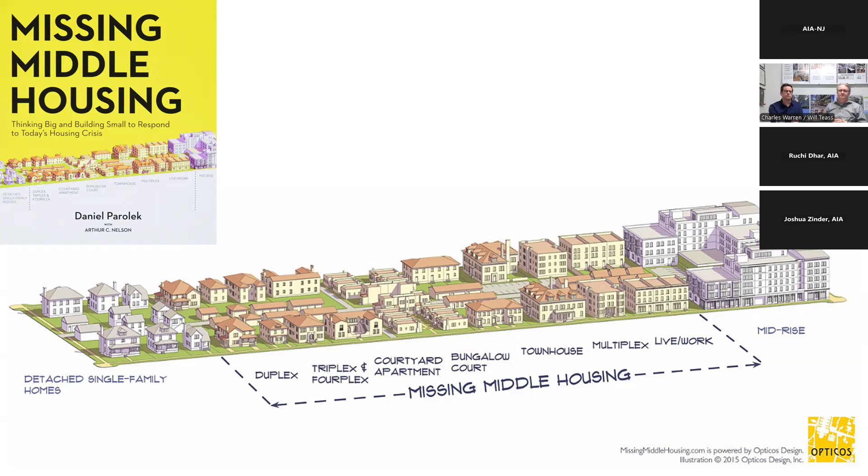So this is another poll question. For those of you - this is a personal preference, and again this is anonymous - but I'm curious within this audience if you can rank the top 3 choices of where you personally would like to live. Is it a single family detached home? Is it a duplex? Is it a single family attached or semi-attached, like a row house or a brownstone? Is it a triplex? Is it a large apartment building? Often they have amenities that are actually pretty nice, pools and whatnot. Triplexes - just getting a sense of where folks would like to be.

So we'll give that poll another minute or two. So I think it seems like most people prefer either that single family detached or single family attached.

Cool. And I think if anyone's interested, I think that we've done this before where we've exported the data, and we're happy to share that. Yeah, it's kind of an interesting way to look at it. All right.

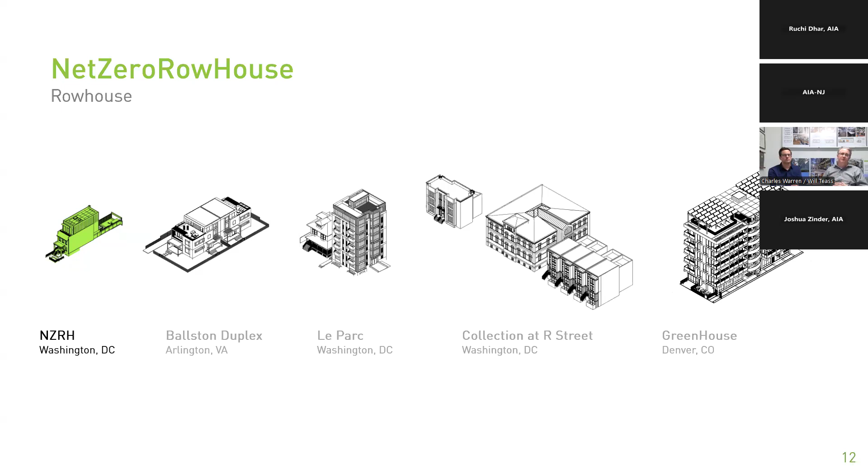And so to do that, we wanted to create space above. So we have what's called a pop-up.

We have space below in the form of an accessory apartment or separate dwelling unit, and then we also did a rear addition. But one of the things that's important to note here is that we were very interested in maintaining the relationship of the existing fabric to the street. Keeping the porch was key, keeping the dimensions of the front yard was important, keeping the existing window masonry openings, and really preserving that because it has such a key relationship.

And then what you're seeing above is some sense of that third floor addition. That was set back both because we needed to for zoning, but also because it gave us an opportunity, as we'll see later, for some more outdoor space.

One of the things we try to do as designers is really think about not just the building we're working on, but also the streetscape and the adjacent construction. Those are some of the clues or constraints that are really important to consider when we're thinking about design.

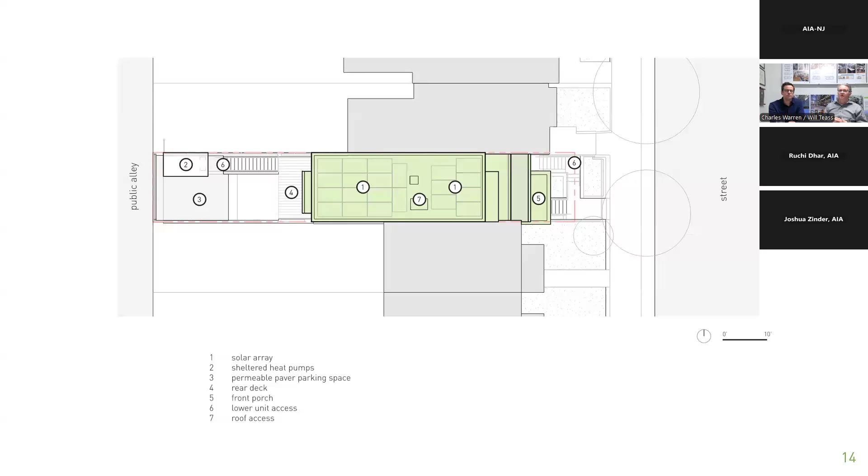So in order to take a house that was about 1,500 square feet and expand it, we needed to go back, and you can see that rear addition here. We also have a public alleyway at the back. We're blessed to be in a city that has a really robust alley system, which helps with a lot of these projects. We were able to create off-street parking, and then we have an entrance, which is keynote 6, down to the lower level.

So this is a diagram of one of the types of projects that we do. What's in green is what we kept, right? We kept the front facade, we kept the roof line, we kept the party walls, obviously, because they support both our construction and our neighbors. But then we talked about adding things.

What you're seeing in yellow are the rear walls that were added. And then this project, we went a little bit above and beyond, related to the desire from an interior space perspective of minimizing bulkheads, but also allowing us to run these systems as part of a net zero project. So we replaced the floors, and then we went down into the ground, which is where we have that accessory dwelling, and then we also did a 3rd floor addition.

There was a point at which you opened the front door and looked down a story into a pile of dirt, and looked up into the sky. It was nice to get past that. It was fun for a little bit.

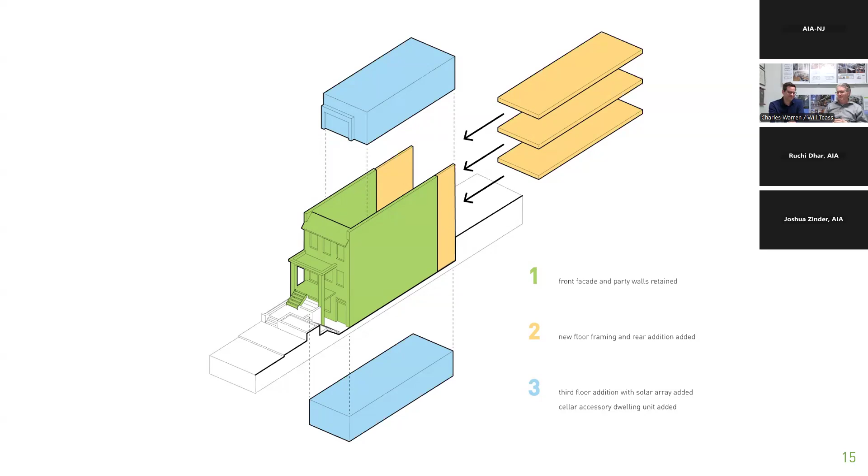One of the other more subtle things here is we played with the section a little bit, so you step down from the living room passageway into the kitchen. Again, it goes back to this idea of keeping a relationship to the street, keeping the floor lines of the existing floors even though we replaced them, maintaining the relationship of the floor to the window and then the windows to the ceiling. But we wanted a bit more ceiling height, so we ended up pushing down further into the ground at the back, which corresponded to the bedroom below.

Creating outdoor space in urban environments is something that we also are very focused on. So in this case, we created a space at the rear with a pergola. It's an opportunity to connect the inside to the outside.

We can do this kind of thing in our climate zone probably for about 6 weeks out of the year before the mosquitoes rush in. So everyone's first question is always, well, what do you do about mosquitoes? The short answer is there's a roller screen that can close off the two areas.

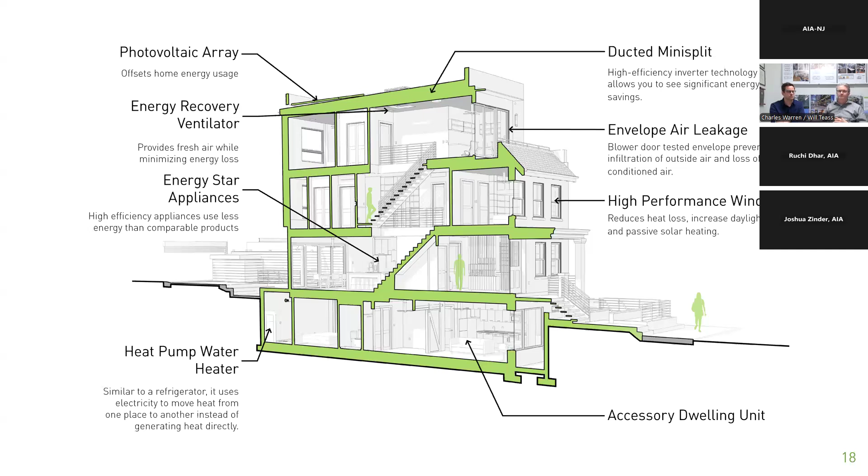I think right now we're seeing this evolution on this block and other blocks where more and more people are extending back and extending up. So right now it sticks out a little bit, but the idea was to compose something a little more contemporary as a counterpoint to the front.

We used a combination of resawn wood here with some boral siding and some vertical metal siding to create a palette and a composition. And then having that open space that connects the living areas below. This is an image at the very top where we took that top level and set it back a little bit, creating some outdoor space.

And it really, because there's a beautiful tree in front, certain times of the year you have this wonderful treehouse experience. Another benefit of the site plan, which was happenstance, is that this is north facing, so in the spring, summer, fall, you're generally in a fair bit of shade, which is nice, particularly when it heats up.

As I mentioned, this is a net zero house. This is a passive house. I should also mention, in the interest of full disclosure, this is actually my house. And this is my wife and I sitting on that porch, and it's a space that we really, really enjoy.

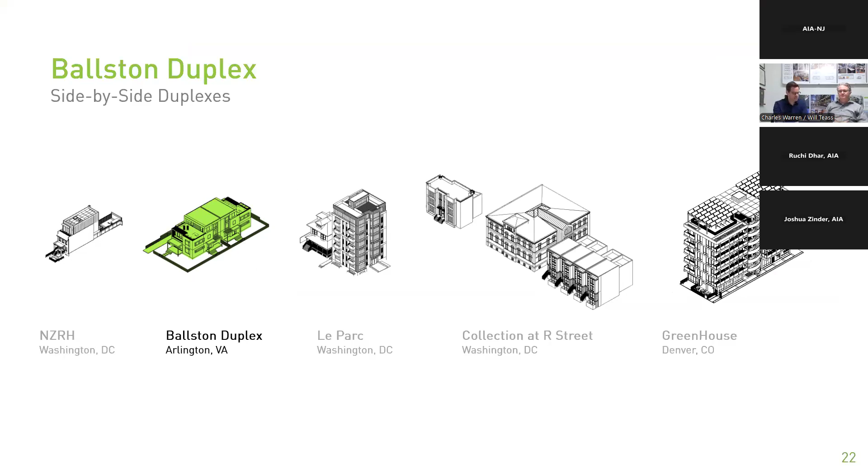So we wanted to move on into the next project. Charles will take us through Ballston Duplex. Great, so this is a project we're calling Ballston Duplex.

So this is located in Arlington County, Virginia. Ballston is a neighborhood in Arlington County, a fairly affluent suburb just outside of Washington, D.C. And in many other similar counties in the country, there's a real housing affordability issue. This county is also home to the Amazon HQ2 campus, so there's a lot of demand being thrust upon Arlington County. It's also a location with a lot of tech industry, defense contracting, I'd say government-adjacent industries. We'll see how that plays out over the next couple of years, but there's a high demand for housing and a low ability to produce it.

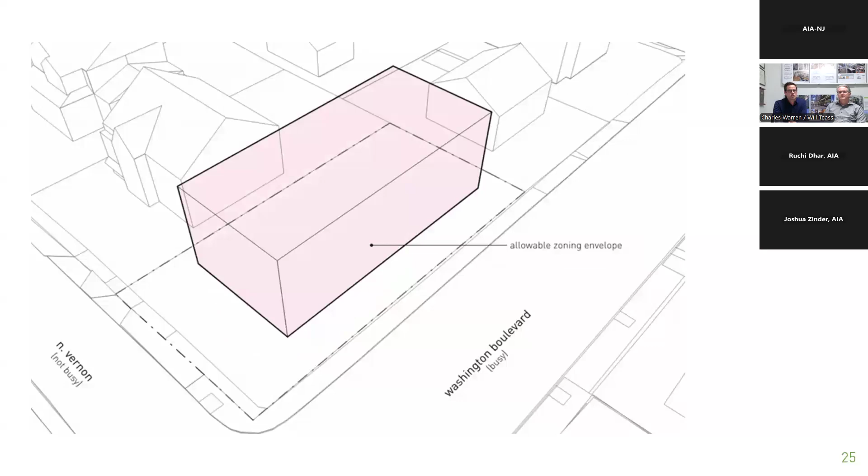So just a quick strategy. We have this cute little animated graphic here, but the existing structure that was there had really been damaged and not maintained, so it didn't make sense to retain it. That was taken down as part of the project.

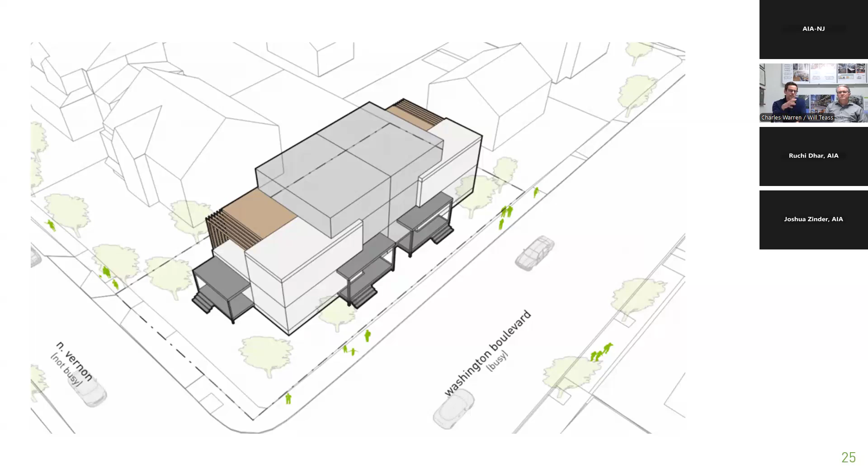The loophole I described requires the house to have two entrances off the busy thoroughfare, so that's why we kept entrances along Washington Boulevard. From an architectural standpoint we really wanted the entrances on the less busy street, but we were kind of hemmed in to do that here. To get this project to pencil out, the units had to be fairly large, which meant we needed a third floor. So from a massing standpoint, we tried to concentrate the height in the center of the building, dropping the massing down as it tapers back toward the residential streets and the neighbor to the east. We also added a series of porches to help bring the scale down to a human scale at the entrances.

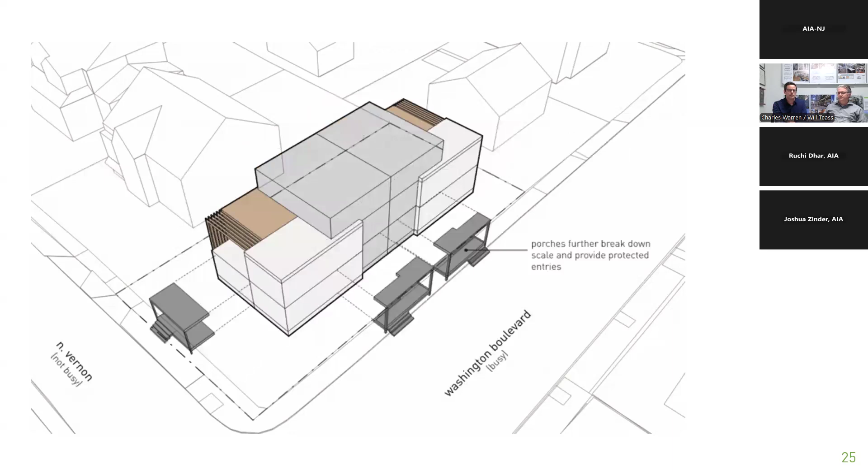Part of the project was subdividing the lots, so there are two lots created here. This is a true duplex with a party wall in the center. There's a common shared driveway that allows access off the residential street to the plan-left, west side, with a common entrance. The first floor is primarily living spaces—kitchen, dining room—with the garages, and the units are mirrored across that dividing line in the center.

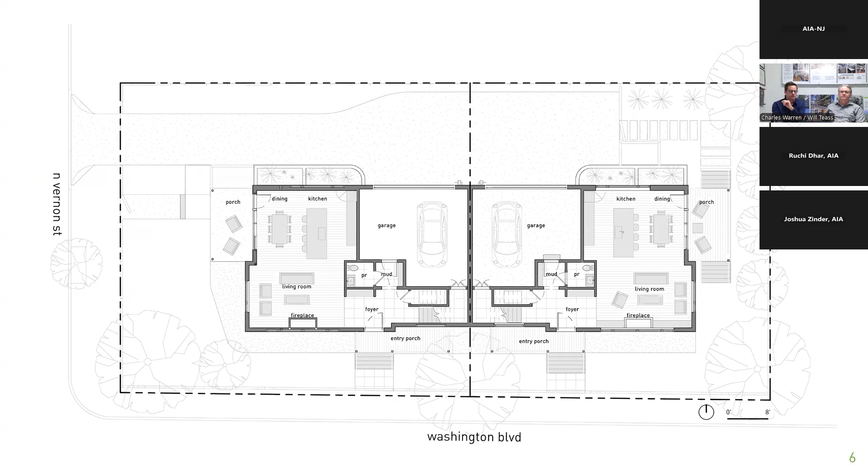One of the things we tried to do is introduce a lot of natural materials—we're using white oak and nice stones, but mostly natural materials as part of the project.

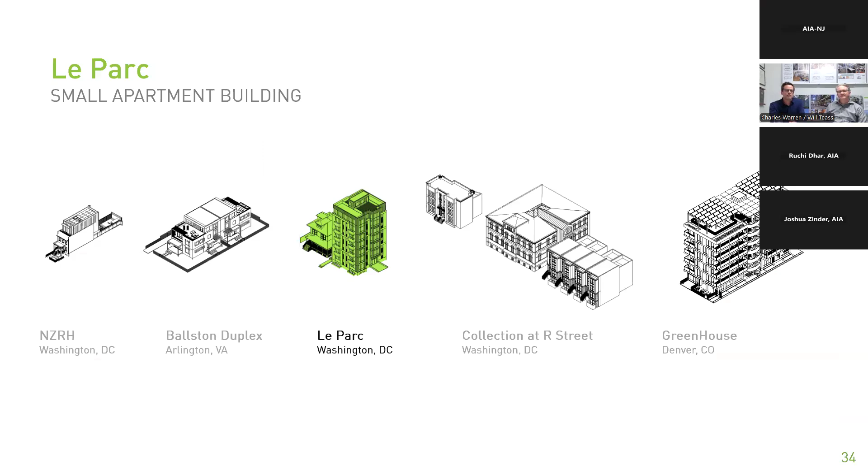So we'll jump to another project in scale - Le Parc, go to the next slide. Very similar in the sense that we have some of these abandoned lots, which tend to be a pretty common site that we end up working with. You can see a classic problem we have in DC, where these single family homes get kind of orphaned on some of these larger thoroughfares. This project is located in Cleveland Park, a historic district in Washington, D.C., about 2 blocks from the National Cathedral. Wisconsin Avenue is the major road on the left, and Macomb Street is a smaller neighborhood serving street.

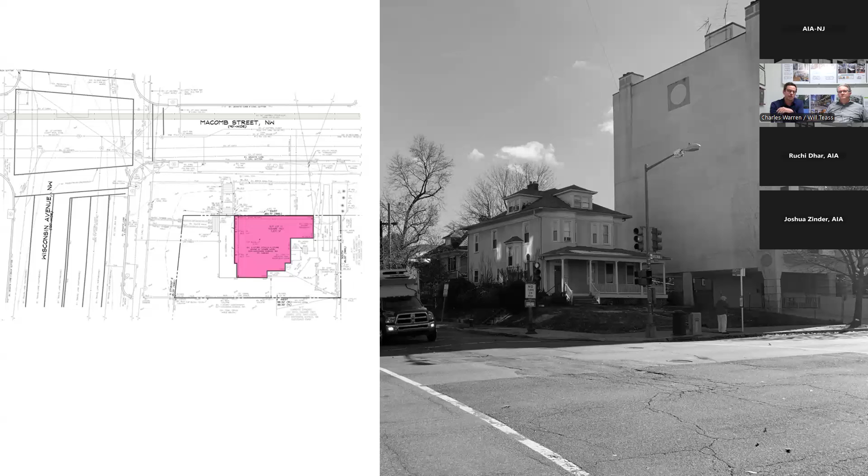This building was not technically landmarked, but it was considered a contributing structure to the historic district, so it was protected in that sense and we could not tear it down. So then what do we do? We had to get pretty creative.

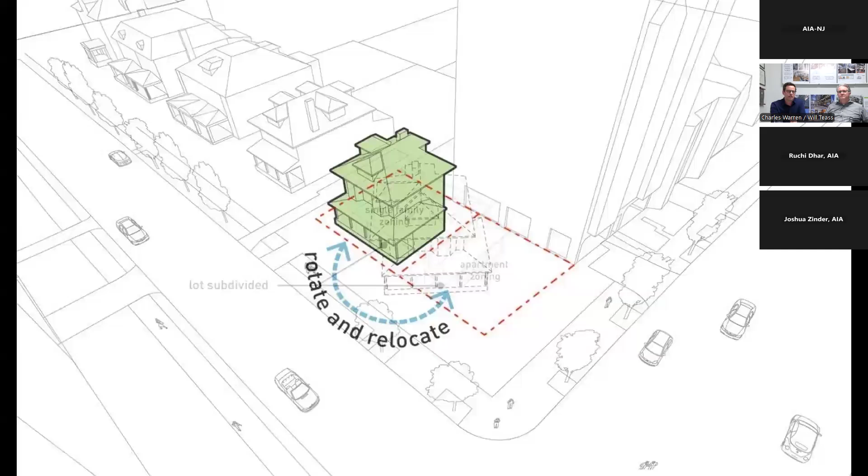We studied the site heavily, and it seemed that if we could really just move the house, we could free up the corner along Wisconsin Avenue for a new apartment building. Our strategy was to demo a non-historic rear addition on the house, move the house and rotate it to align with the existing historic houses along Macomb. That would free up a zone on the right side, a continuation of the street frontage along Wisconsin Avenue, where we could take advantage of the full zoning envelope.

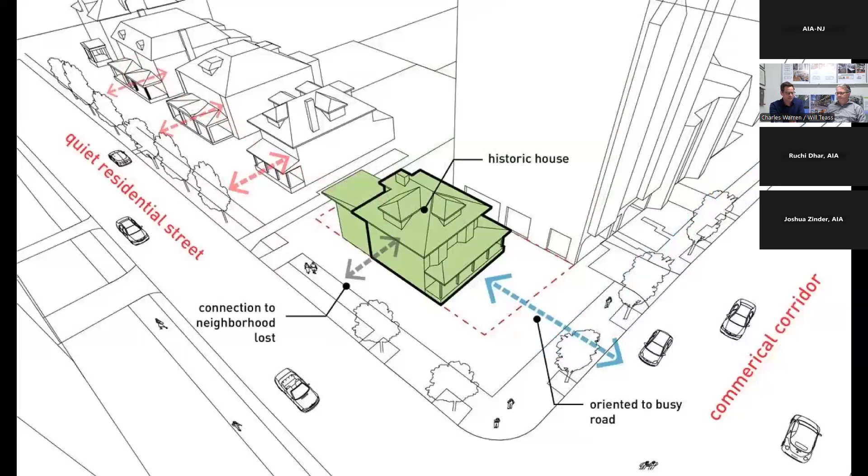That's a cool diagram, but obviously things are not nearly that easy. So here's a couple images of the house as it's being moved.

Initially, the way we did this is we had to lift the house up on cribbing, demo the foundation that was under the existing house, excavate and pour the new foundations, which had to be very precise because it had to line up with the house.

And as you can tell, it's a 100-year-old house, so it's not very square. Then we had to somehow manage to turn it 90 degrees and slide it over on a very tight urban lot, which you can see is a pretty heavy logistical feat. It was a fun day for the office - we all went out and watched this because we don't get to do this very often.

A shout out to Expert House Movers - these guys are incredible. If you ever need to raise a house or move a lighthouse - these guys have actually moved lighthouses, so that's how we learned about it.

So I'm gonna jump ahead to the final product, but I'll do a quick summary of the entitlements. I'm not going to bore you too much, but again, this is a project from 2019, and it was just delivered last year. So the process we had to go through, we had taken those initial concepts to Historic to get them approved as a conceptual idea, which took about a year for us to get through that portion of the entitlement process.

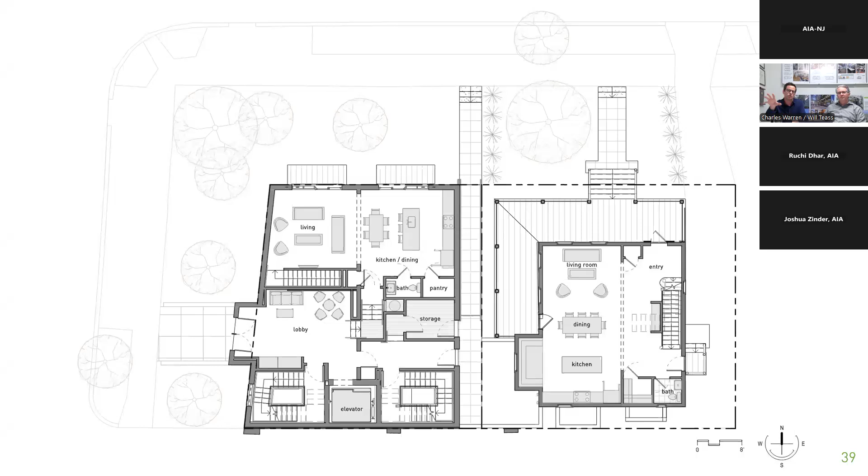This is a little bit of a poster child for what we'll talk about later - the point access blocks where you can do a single stair, single means of egress building. But you can see just the amount of core that we needed to have to get this to work. The layouts are really 2-bedroom units, and there's a nice exposure because you get 3 exposures around the building.

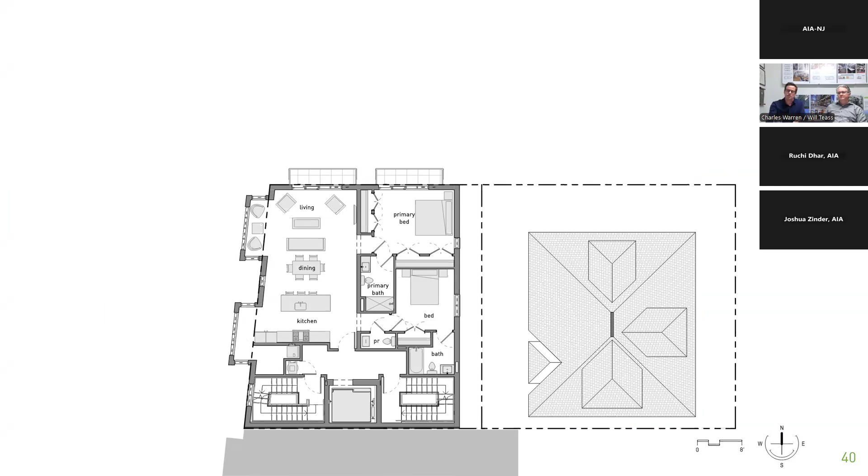DC does have inclusionary zoning regulations that kick in after 10 apartment units. What that really means is you need to provide an affordable apartment once you reach that threshold, and DC incentivizes this process with an additional bonus density to help underwrite those affordable units.

To be totally frank about it, on this project the financials of that unit didn't really make sense. So we designed this building to be 9 units. Part of that was just the margins we were dealing with and getting the numbers to pencil out - with carrying costs, site complexities, and the escalation in construction costs, it just put too much financial pressure on it.

And because of the way the site was configured, we actually couldn't utilize any additional bonus density - we're kind of stuck with the footprints we could do. So we couldn't add any more density to help underwrite those affordable units. These are more on - I wouldn't call them ultra luxury, but they are on the higher end of what you would see.

One thing that we have in DC is a tradition of what they call bay projections or bay windows. If you've ever walked through some of the row house neighborhoods and seen the nice bay fronts, those are technically in public space. That was part of the master planning of DC.

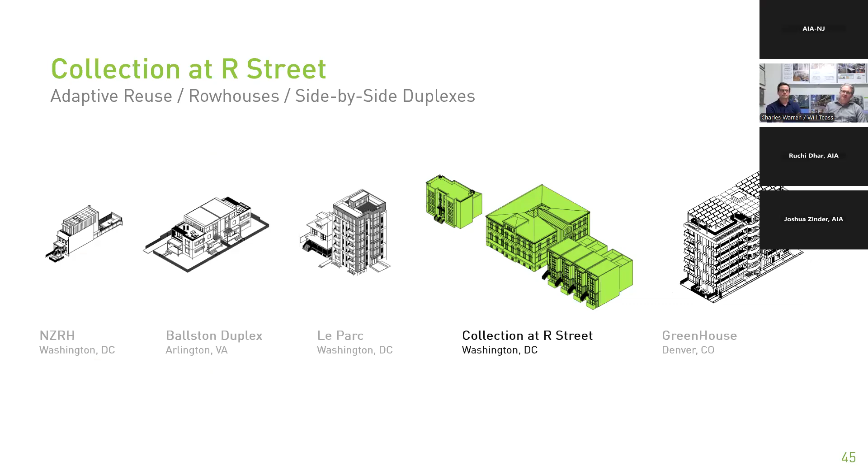So we have another built project we wanted to talk about tonight, and then we'll move on to our final project. The Collection at R Street really represents a number of different types of projects all in one opportunity. It was a great opportunity for us.

It starts with the existing Morse School, which was transformed into the offices of Africare, a nonprofit focused on providing service and support to African nations. They ended up merging with another entity and no longer needed the building, so they sold it to our client. The building itself was surrounded by open space, which again is relatively rare in DC.

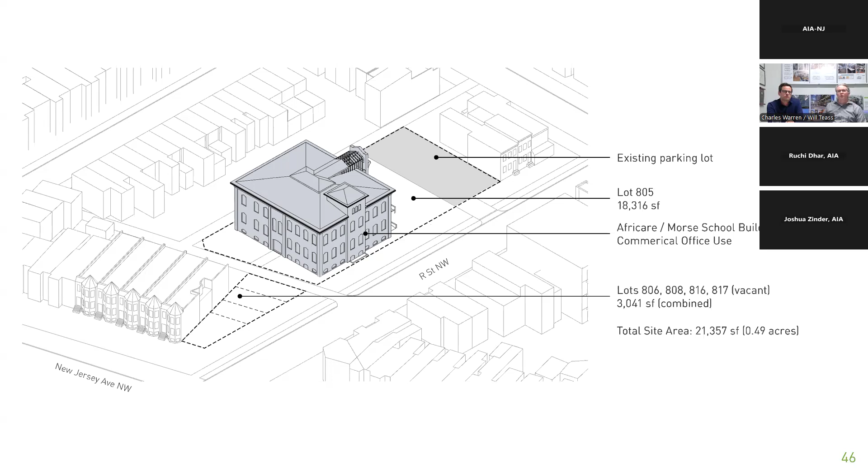On the west side there was an existing parking lot, and on the east side they also owned a trapezoidal shaped property on the corner, which we affectionately refer to as the wedge lot. Our proposed strategy was to convert that school building, which had been converted into an office building, and now it's taking its third act as an apartment building with 12 condominium units.

On the west side of the site we ended up with an additional 7 units. 3 of the 4 buildings are traditional flats, and the last building is a single family. There was an interest from our client to maximize the different types of product on the site. The wedge lot is a classic duplex, very similar to the Ballston project we saw previously, with 2 units side by side.

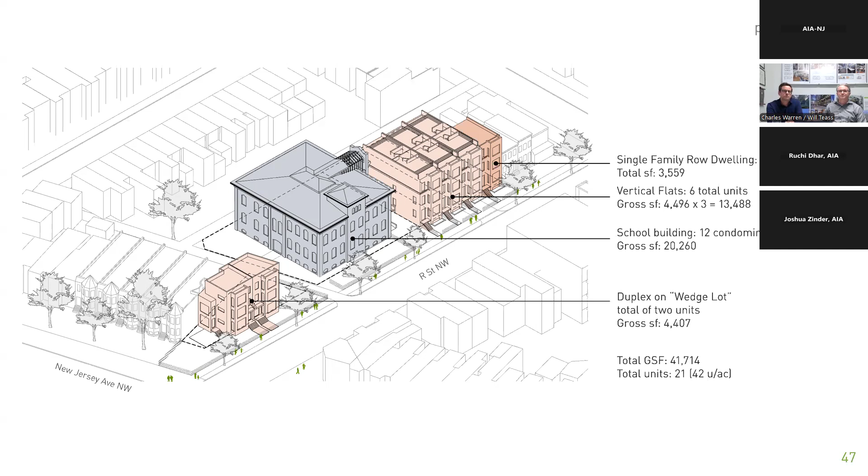One of the recommendations made during the process was to voluntarily embark on the landmark process. This reduced risk for our client, and by controlling the landmark process and pursuing it ourselves, it allowed us to have more control over the end product. Part of that was working with a historic consultant, of which we have great ones here in DC, to develop a preservation plan, get into the building's history, and identify the important characteristics, which is really the heart of the development.

You can see there's a wing on the right-hand side that represents the intervention done in the 70s or 80s when it was converted to an office. The plan of the school building is essentially four rooms grouped around a center space. In its version as an office, they created a large three-story atrium, which was quite dramatic with a large curved stair on one side, but it wasn't entirely practical for converting that atrium space into residential units.

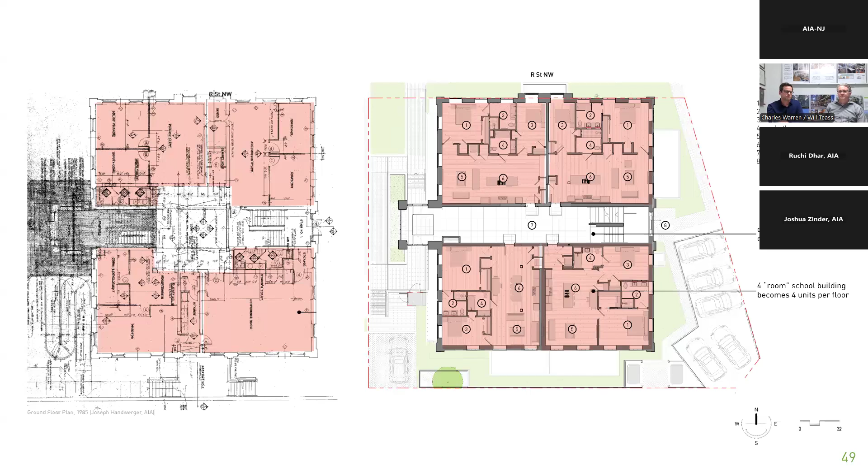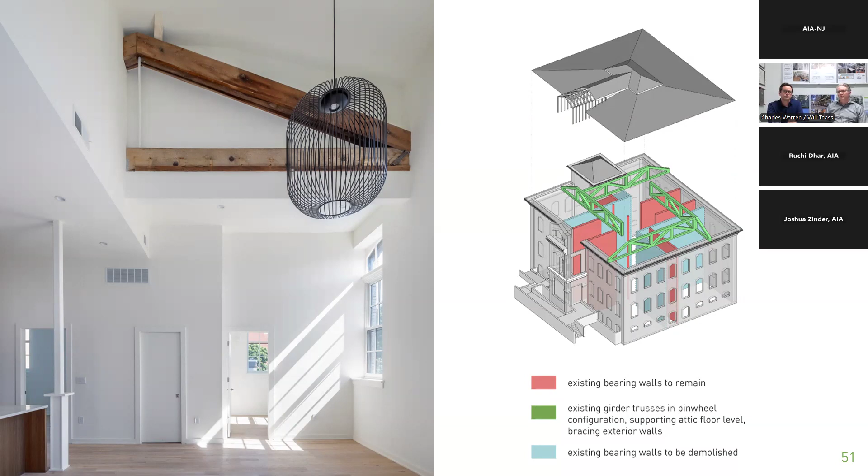I think the real takeaway here, which we talked about a bit during our talk at National, is that it was very important to understand the diagram of the structural system of the building. This ended up being a relatively costly endeavor, and I don't think the general contractor who worked with us really understood what they were getting into. By the time they got into it, it was a little too late, so in retrospect we probably would have pushed a little harder to keep more of those masonry walls just to minimize how much shoring had to be done on the project.

Often the upper level unit would sell very quickly, and everyone would be very happy with it. In the lower level unit, you would often put the living area on the ground floor and the bedrooms in the basement. So there was always this bias against having that arrangement.

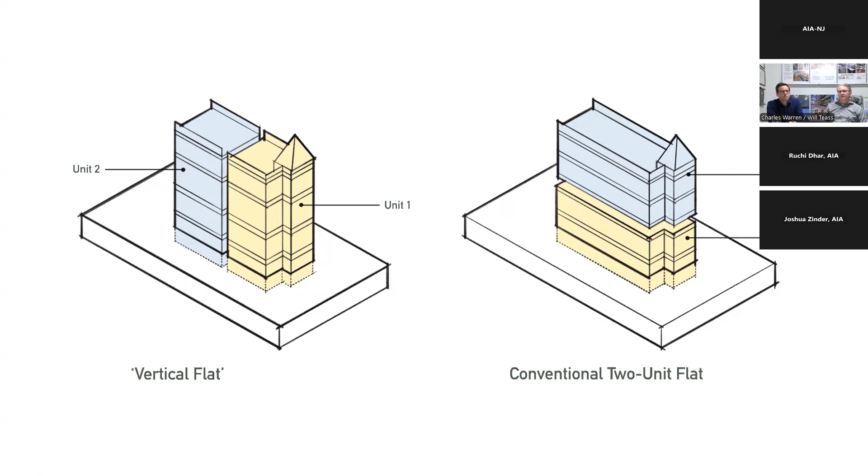So we worked with our client, and we've tested this out a couple of iterations where we call vertical flats. Instead of separating these units horizontally, we actually separate them vertically. We have a front unit that faces the street, and a second unit that faces the rear. It gives you very different characteristics for the unit, but there's a parity there. It also gives you the opportunity to get up on the roof for both of these, which is a very important thing, as we previously mentioned.

But it was also important to be able to get from the front unit to the back, where you have parking and trash and services and recycling, etc. So we created a similar corridor at the bottom. That kind of interlocking relationship has actually proven to be pretty useful. It allows us to get some services into the building that would have otherwise been more challenging to do.

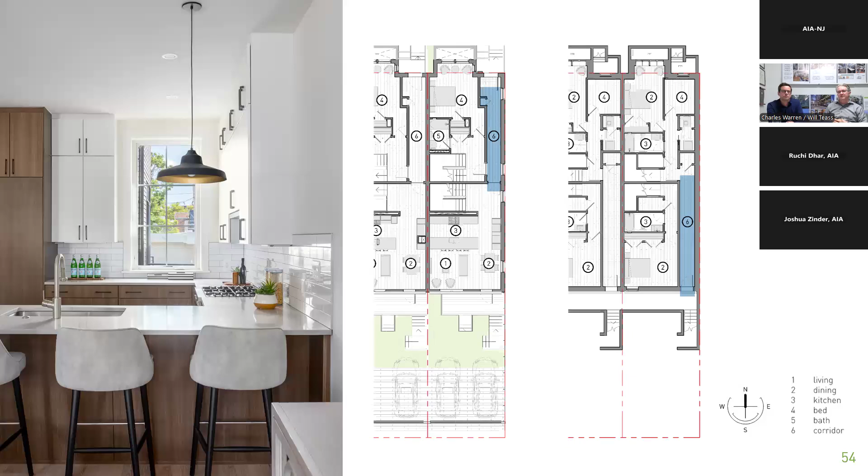Again, light is really important. Here, the image on the left is of the single family row house where we actually have a dog leg, which is another characteristic of some of the work that we do. That allows you to introduce more light into the deeper spaces.

And then finally moving on to the duplex. This is where we have a more traditional side-by-side arrangement. Here, we spent some time looking at where the entrances were going to be and ultimately decided that having the entrances sort of together, so there was a sense of engagement with the neighbor, which is a pattern of development you see up and down the streets in this particular neighborhood and really throughout DC, as opposed to two separate entrances, was important.

It also allowed us to create very abundant outdoor space at the ground floor, which is somewhat rare for these kinds of projects. What you're seeing also is the pattern in the lower right-hand corner of picking up those bay elements, as well as the porch and stoop elements of the surrounding neighborhood. I think it really underscores one of the learning objectives about spending a little bit of time understanding what the context of the neighborhood is, looking at some of the strategies there for design cues. Maybe it's a different formal language, but you're picking up on some of those use patterns.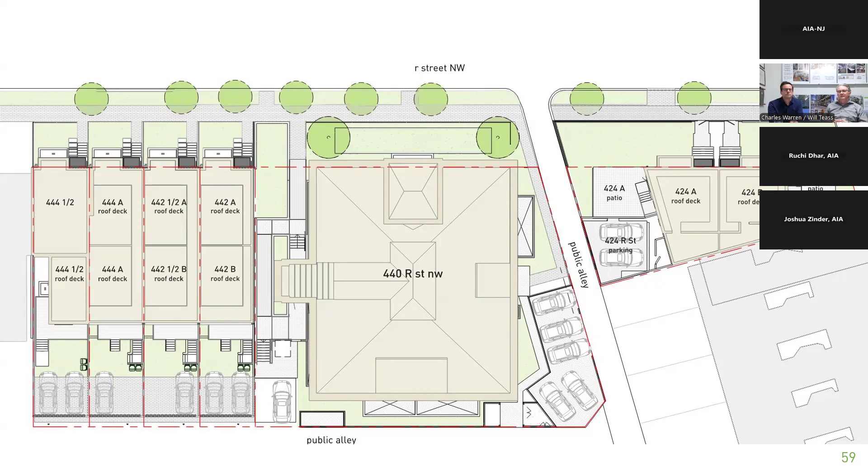We also wanted to gauge the type of work this group does, specifically how much of your work is adaptive reuse and or historic preservation—is it a significant portion or an insignificant portion? In DC, it seems like every neighborhood has a historic district, but that's not quite accurate. Still, we do quite a lot of work in and around historic districts. Sometimes it can be a bit of heartache, but in general they really enrich the final product. We fundamentally believe in historic preservation and the value it gives to a city. I'd say ours is probably more than 50% in the city.

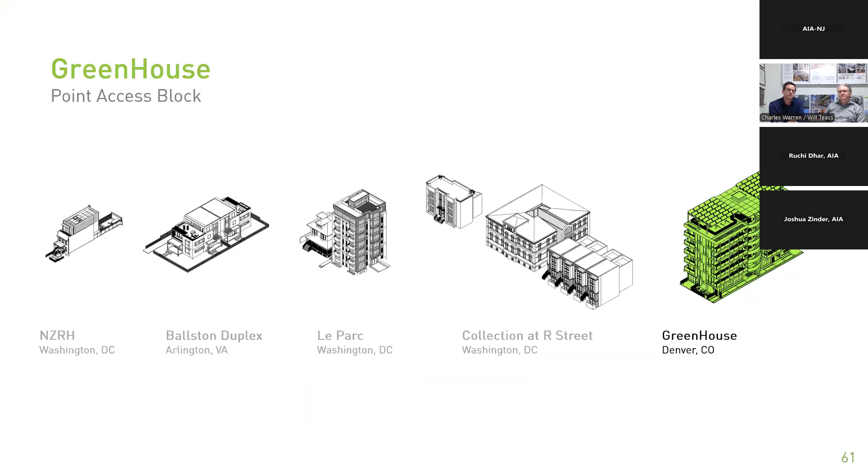So we'll pivot to our last project here, which I think represents something we're definitely interested in. There's a bit of a new-kid-on-the-block feel, but a lot of folks are really pushing what we call point access blocks, or single means of egress buildings. This is an ideas competition we entered recently, sponsored in Denver, exploring an urban site very similar to the types of projects we do in DC.

Just to give you a quick overview of what this entails: the short summary is any building over 3 stories needs 2 stairs out of it. What the point access block, or single means of egress building, looks to do is extend that up to maybe 6 stories with a single stair, which would unlock quite a bit of density. If you saw the project we looked at with Le Parc, that's a pretty quintessential example where you have to have 2 stairs out of the building and an elevator, and your core factor and ability to produce housing units is really compromised.

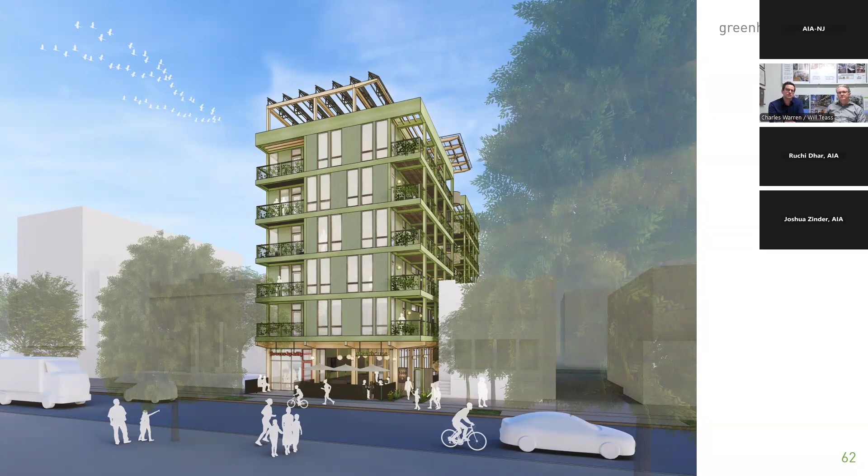So what we were looking at here is the full zoning envelope—we did some studies, some massing studies, to try to understand what we could do. This lot was very similar to an urban lot we'd have in the city, about 45 feet wide and about 100 feet deep, so very typical lot sizes. These were some strategies we were looking at, really just massing strategies about ways we can open up the building and see what forms make the most sense from an efficiency standpoint.

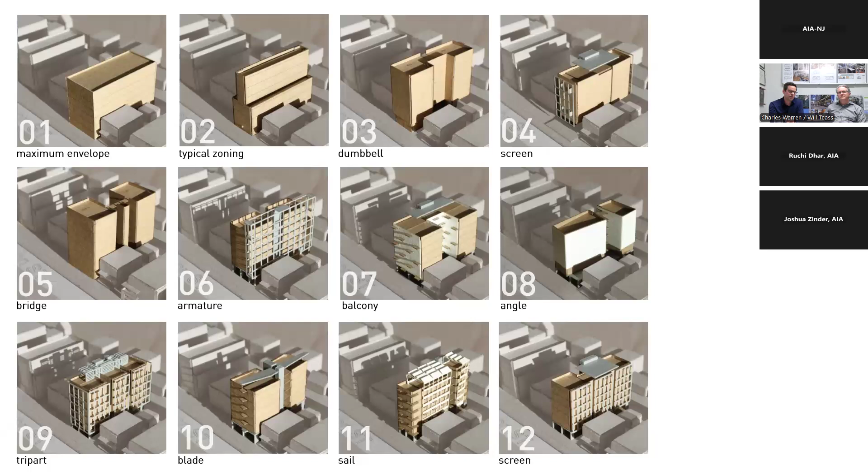The big solution we were looking at here was really trying to keep a side yard on the south side, introducing a single stair, a single elevator core in the center, and then arraying the units off of that.

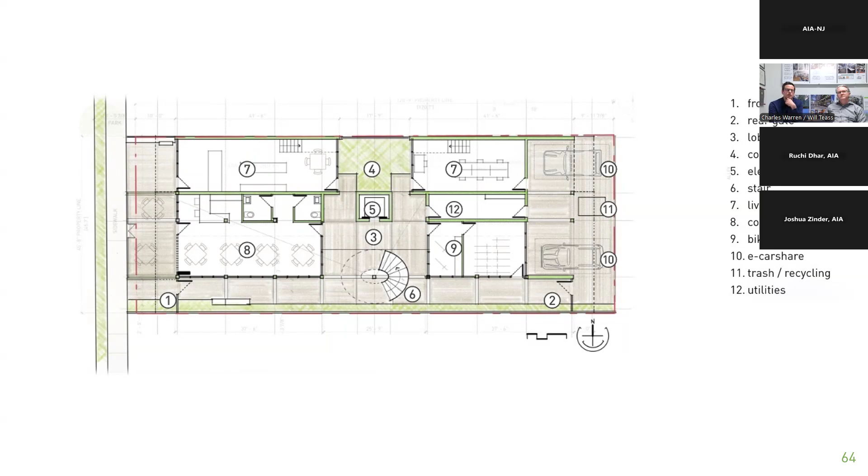This is the ground floor plan. We were proposing a cafe space on the front side, some live-work units, bike storage, and car charging and car sharing stations in the back. So this is our initial ground floor plan, and this is the more typical footprint.

We have a central stair, and all the units are accessed off that central circulation area—that's unit keynote 1, and keynote 5 is the elevator. One thing the point access blocks allow is eliminating the need for that second stair you'd normally need with an elevator. A lot of times on urban lots we elect not to put elevators in because of the core factor—once you factor in two stairs and an elevator, it reaches a point where it doesn't make viable sense; you're giving up 25% of your footprint or more to core.

One of the things we're looking at here is really trying to keep a modular unit type—unit 8 and unit 7. So we have two different unit types, but we've introduced the ability to expand through some punch-outs. These units have a lot of flexibility for aging in place; they can actually adapt over time to the end user.

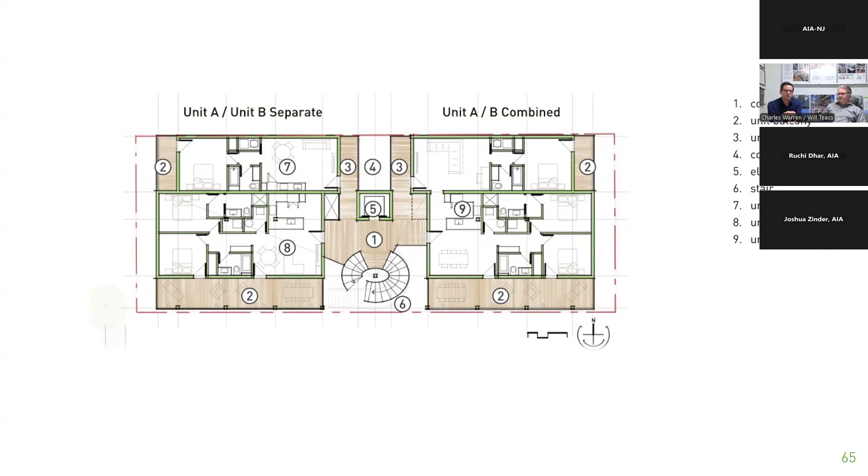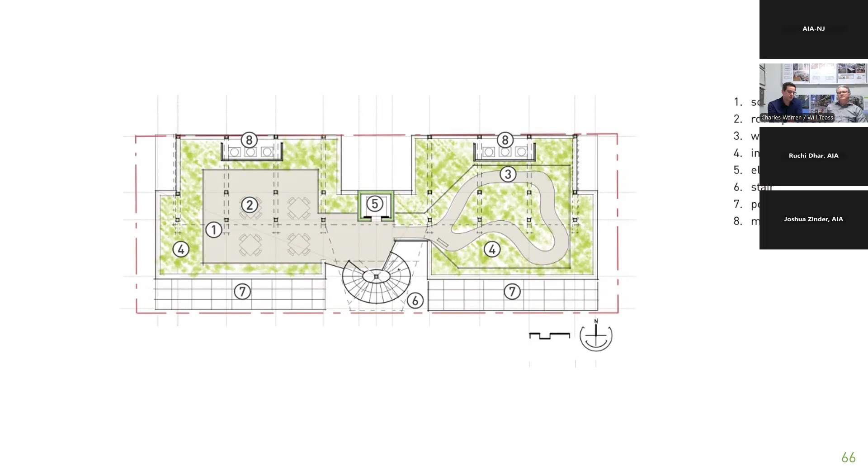Part of the approach here was to think about ways we could incorporate sustainable strategies, so it was designed to be both net zero and a passive house. It included the typical things like continuous insulation and all-electric systems.

We were also interested in exploring the possibilities of mass timber. It's not something we've been able to do yet in our practice, but that was one of the dimensions we were trying to bring to the ideas competition.

There's also this notion of creating an outdoor space in the middle. I think there was a decision early on to separate the two halves of the building, and instead of creating internalized stairs, create an external stair—the ventilation properties that affords, and creating that chimney effect, was something really important.

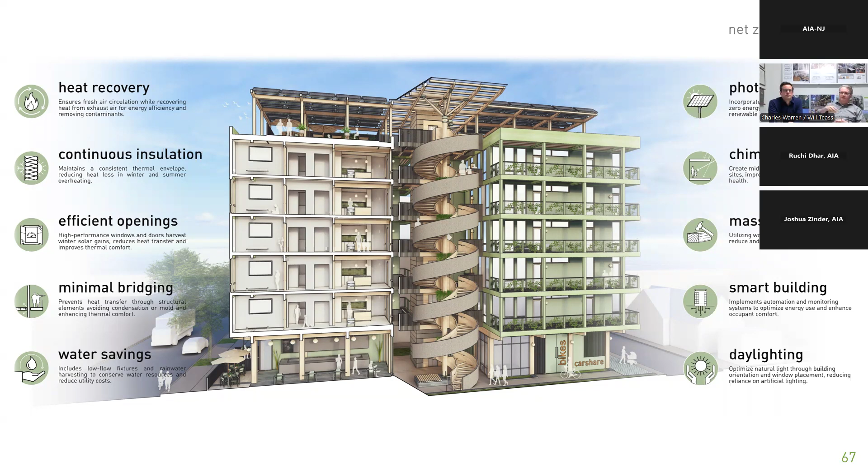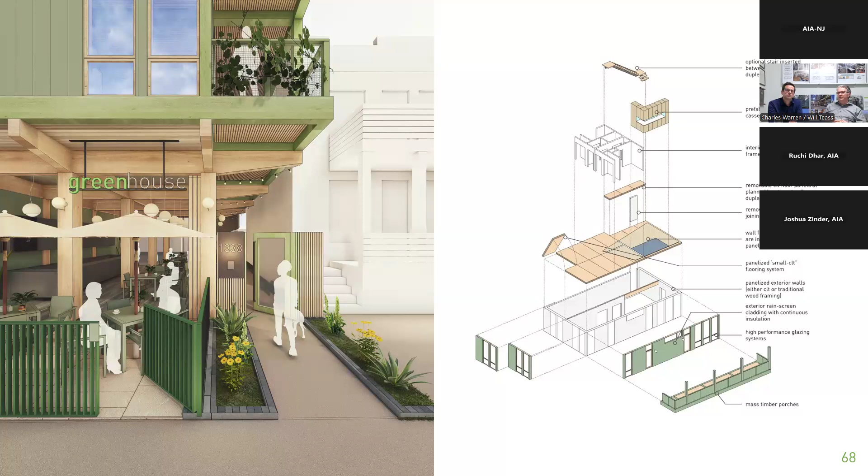On the right-hand side, we were thinking about the kit of parts—the panelization of the flooring system, the exterior wall system, and the kitchen and bathroom as sets of cassettes that could be modularized to some degree. We really tried to take all the things we wish we had done and put them into this project, so it was really fun to experiment with that. One thing we discovered in Denver is there's an abundance of porches.

There's a long history of porches and outdoor space in Denver that relates to tuberculosis and all that. So we decided to take the south side of the building and create mini outdoor spaces for each of the units. We weren't constrained by a client pressuring us to get rid of them, so we made sure to have a lot of outdoor living space.

This actually happens to be in the Capitol Hill neighborhood of Denver, so you're able to get these amazing views out to the mountains.

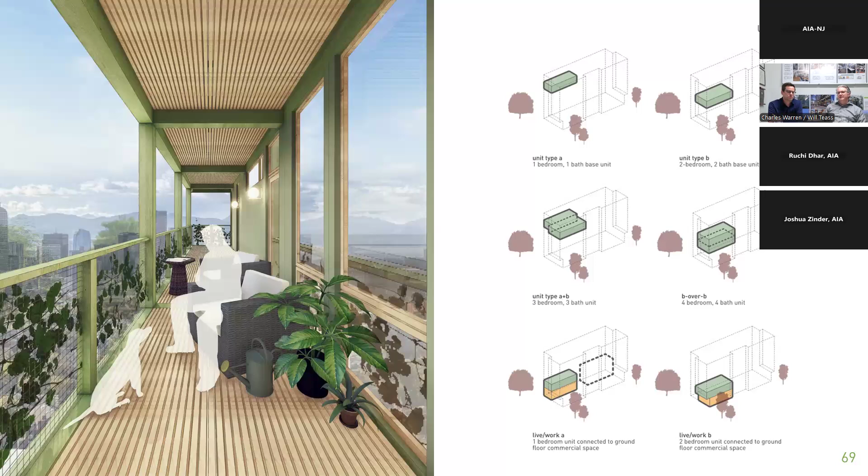And then thinking about unit flexibility, those units can expand to the side, expand up or down, or potentially become live-work units as well. We're trying to build that module in to future-proof the building.

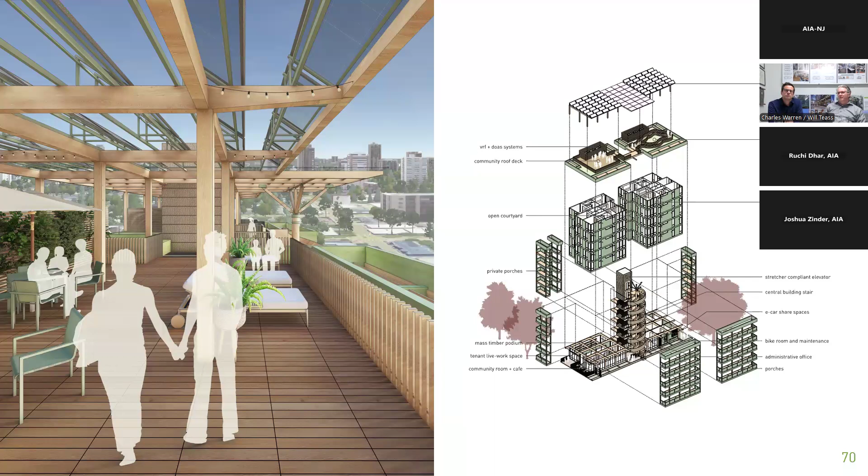On the left-hand side here, we were thinking about the experience on the roof, really trying to activate that roof not just for an individual unit but also as a common space for the building—using the photovoltaic array above to provide shade and shelter. So we're thinking about all those different components of that solar canopy, those porches added on to the core elements, trying to modularize this to the maximum extent possible.

I think this is really the next step in the practice. Charles, in his capacity as co-chair of the DCBI Housing Committee, held a panel discussion just last month with our chief building official and a major developer, really exploring what this means—looking to places like Seattle and New York City where they've already adopted this, and starting to think about whether this is a viable strategy. We think it is, particularly in these relatively low density buildings that can utilize that single stair.

It just frees up the ability to produce housing, but it unlocks the financials that have gotten a lot tighter in the last few years, and getting these projects to pencil out can make a big difference.

It's amazing to think we attended a conference here in our own town last year and went to a seminar where some folks presented this idea. It was really wild because I had a call a couple days later from a client who said, 'Did you hear about this thing?' I said, 'I don't know what you're talking about.' They said, 'I went to this great session about point access blocks.' And I was like, I was there. It was great to connect and get excited about it.